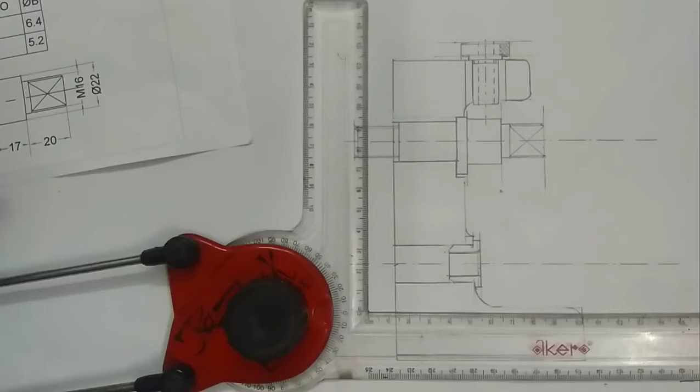In the next step, I'm going to attach this lever. Actually, this one is the jig. I'm going to attach this lever here.

Here it was given the hole diameter was 22. So we know that this diameter is also 22, and the thickness of this lever is 20. Mark 20 mm.

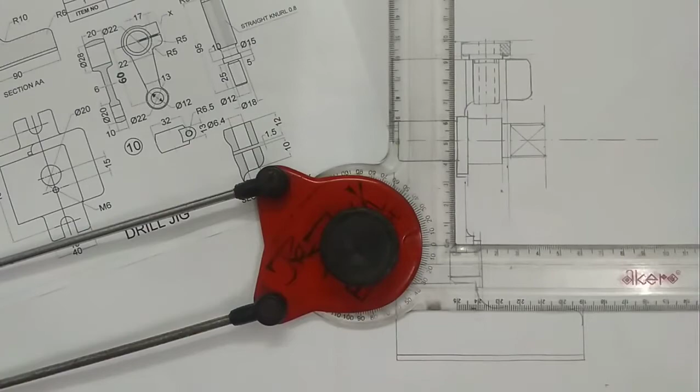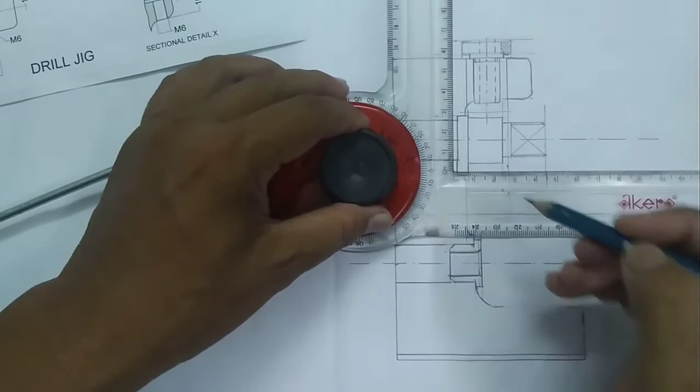This 2-point gap is 28. So from the center line you mark 14. So from here 14, and this distance is also 14.

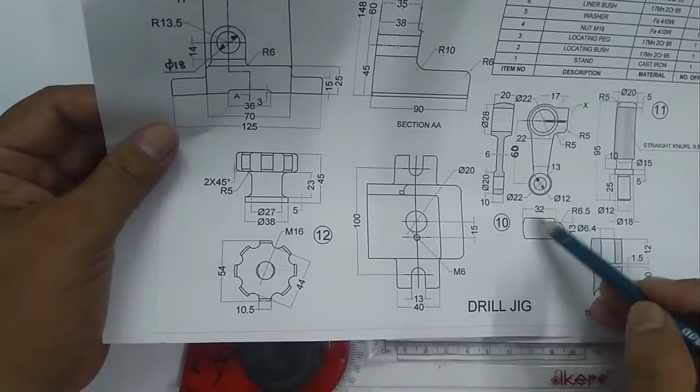And we have to find this point. From the center point to this height we have to mark, which was not given in the front and side view, but in the top view it was given 32. So this diameter is 32, which means from this to this point the distance is 16.

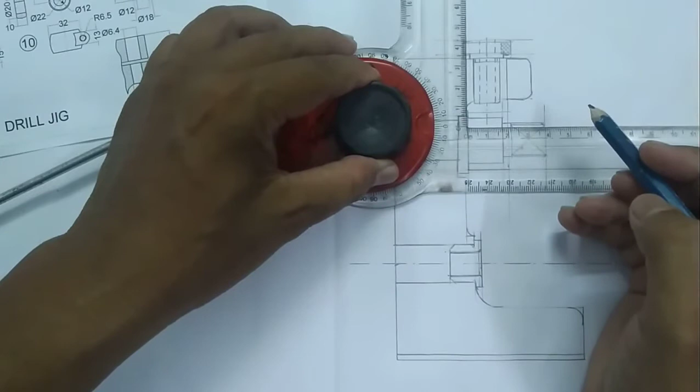So if we first mark the midpoint, here is 10 mm. So this is the center line of the lever, and then mark 16.

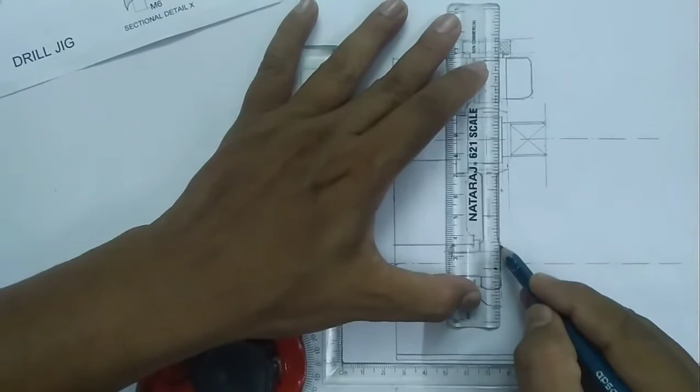In the next one I am going to attach this knob, part number 12 and nut.

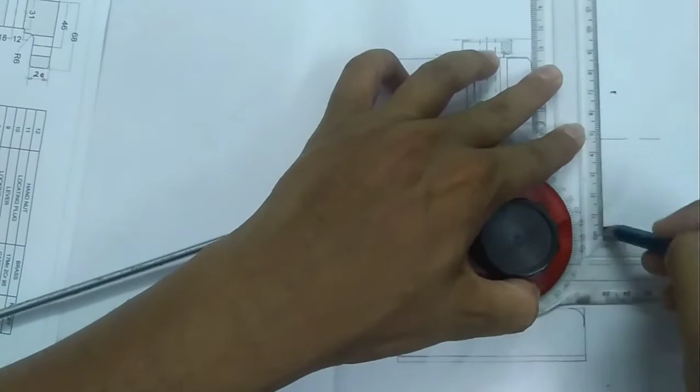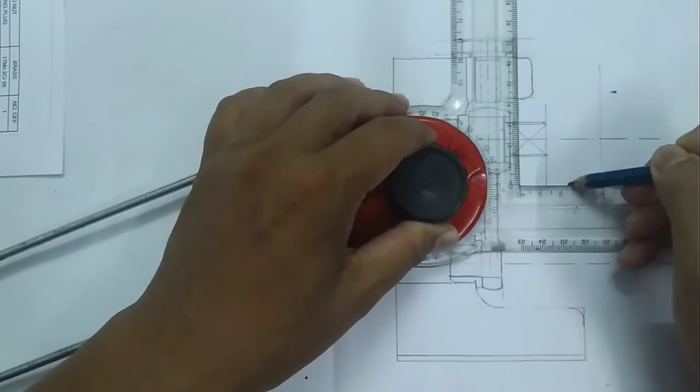So this distance, total distance, was given 45. So from this point measure 45. Also this gap is 5 mm. This distance is 23. This diameter was given 38. So from the center line you will get 19. From here you mark 19 mm.

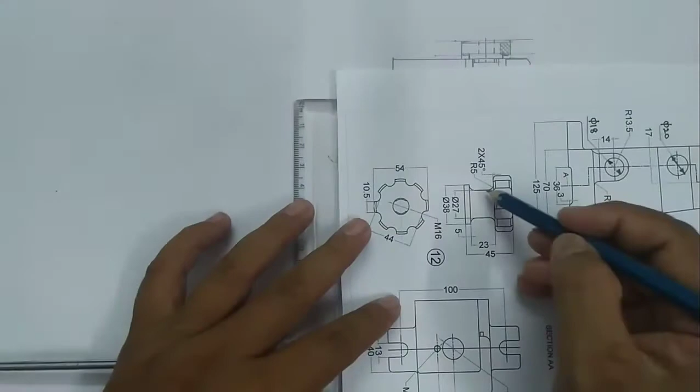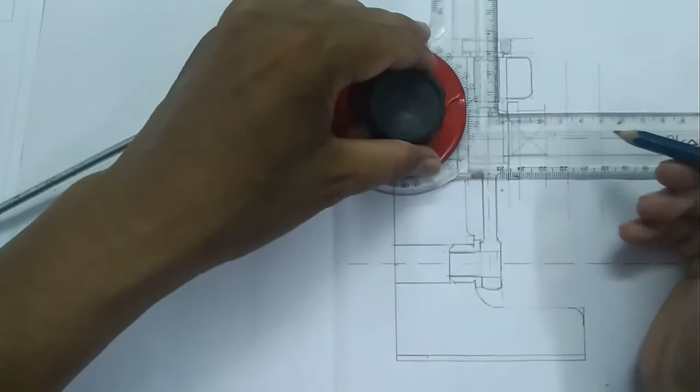This distance was 27, so half of it is 13.5. Mark a point between 13 and 14. And this diameter was given here 54, which means 27.

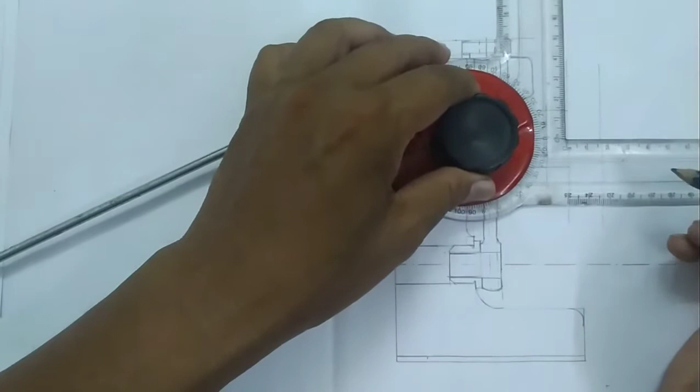Here you can see the chamfer angle was given 45 degree, distance is 2 mm. Rotate your drafter to 45 degree.

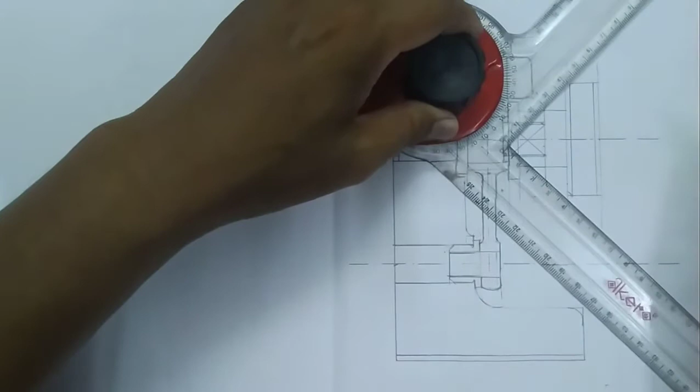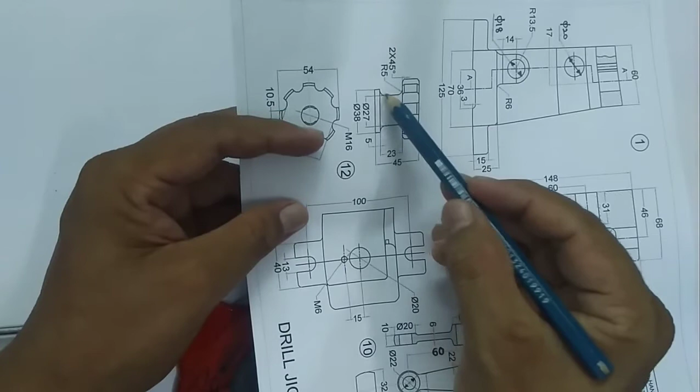Then you can see the fillet. Here the radius was given 5, but here the radius was not given, so we can choose any radius. Choose 10 mm diameter circle to fillet this point.

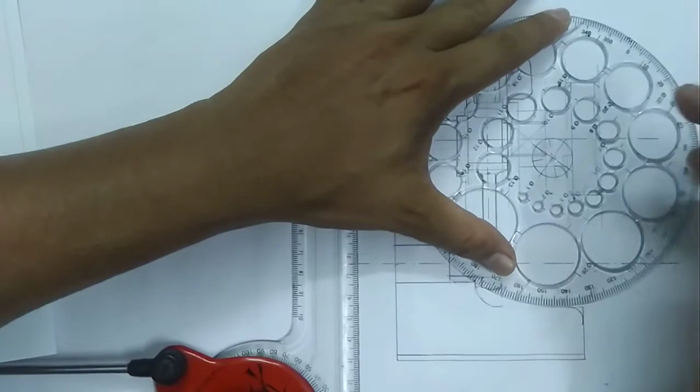Also choose a smaller circle. I am choosing 8 mm diameter.

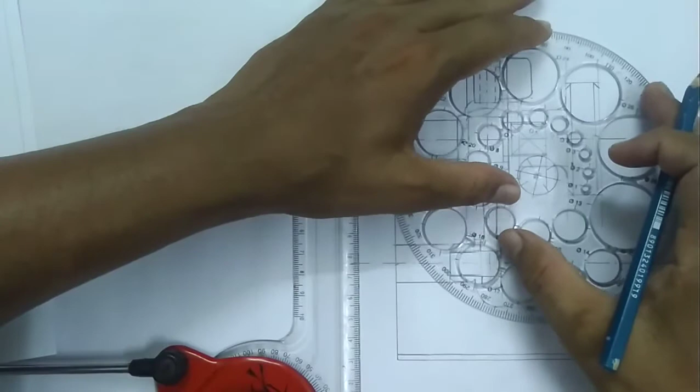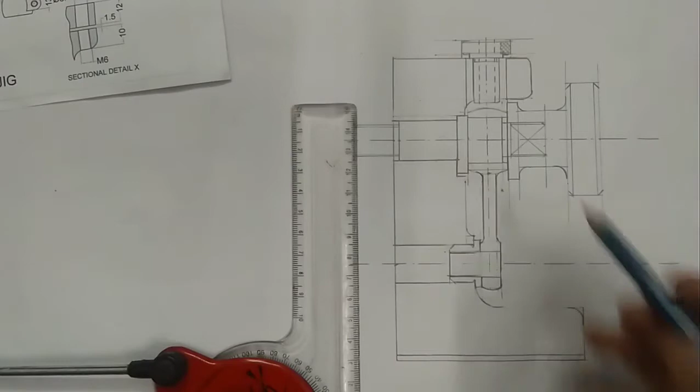Also you can see a threaded hole of major diameter 16 mm. 16 means 8. So we know that this portion, this diameter is also 16. So we can directly draw lines from here.

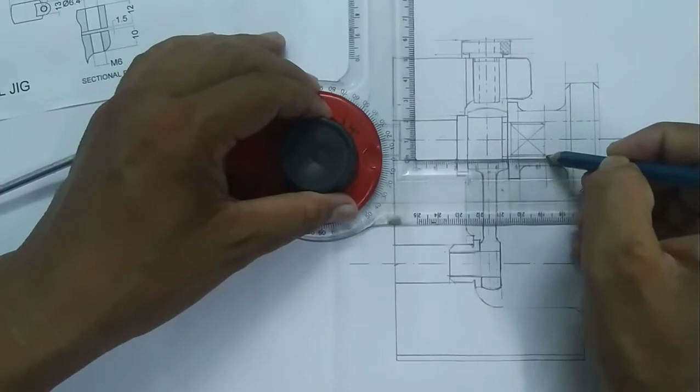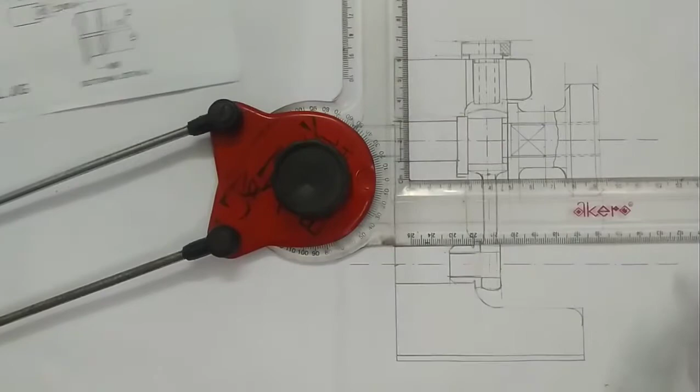Here I am going to do some local section. And these lines, in order to draw them, we have to project from the side view. As I am not yet drawing the side view, after drawing it, I can project the lines here. So at present I am leaving it as it is.

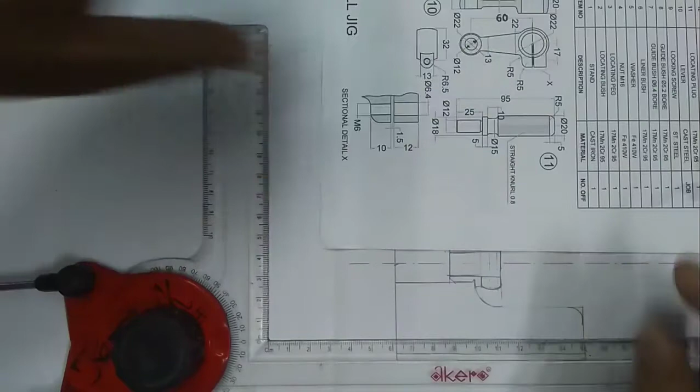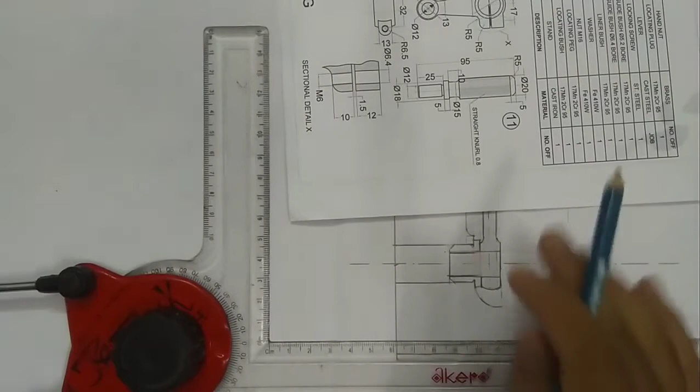Then I am going to draw part number 11, the locating plug, this diagram. So we can see the diameter here, it was given 12 mm. We know that the hole diameter is also 12 mm, so we can insert the plug up to this distance. So this distance was given 25.

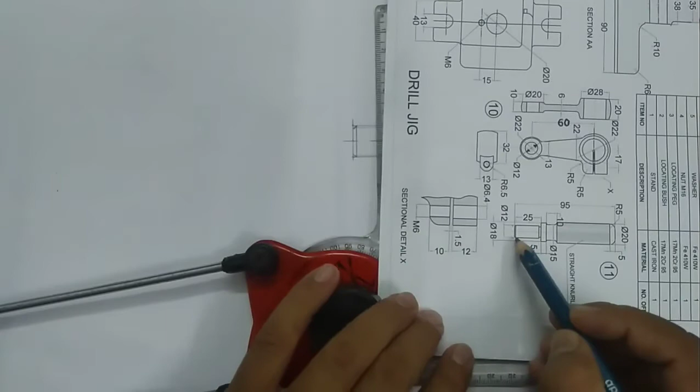So it was matching correctly, this distance is 25 exactly. You can see a small chamfer at the end corner, so we can chamfer here.

Then here you can see a small undercut. The distance was not given, so I am choosing the distance myself, a small undercut. Then this thickness was given 5 mm.

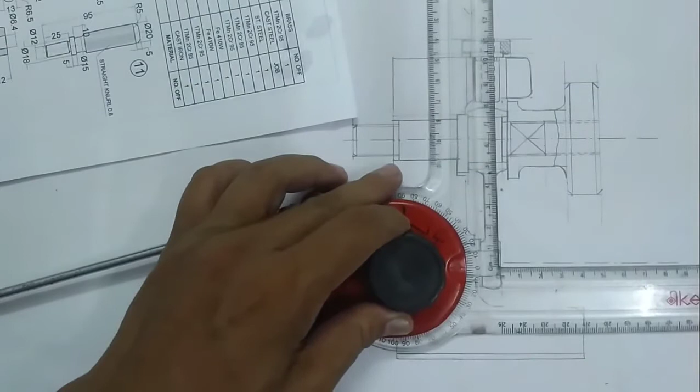And from this to this distance is 10 mm, and the overall distance is 95 mm. Here the fillet radius was 5 mm, so this distance will be 5 mm approximately, which was not important. So this distance is 5 mm, and the diameter given was 20.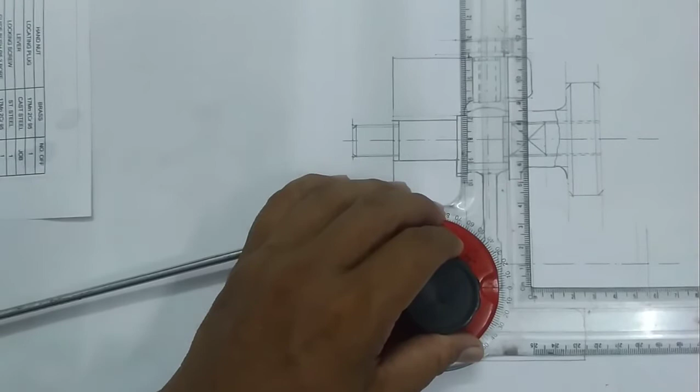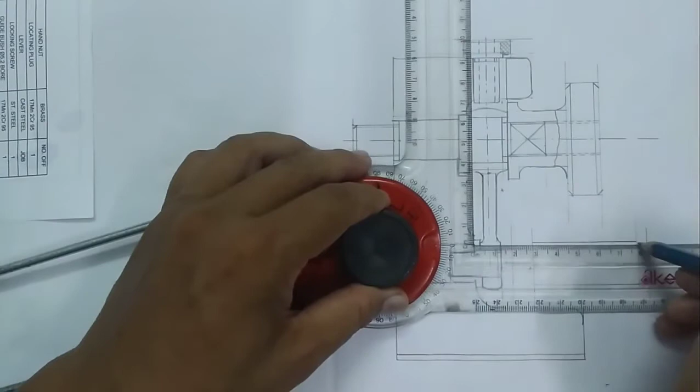So from here I am drawing a line 10 mm below the center line. Choose pro circle to draw the fillet radius of 5 mm. I am choosing 10 mm diameter circle.

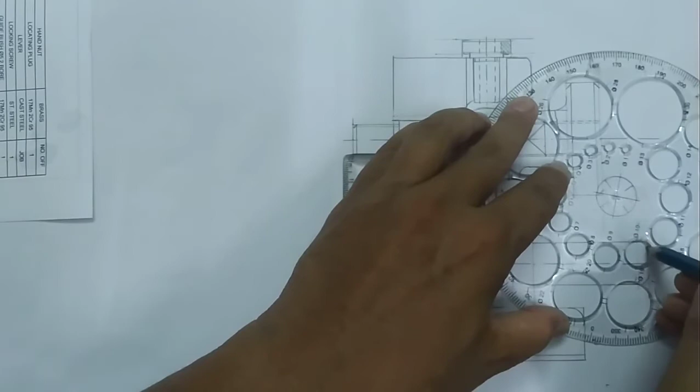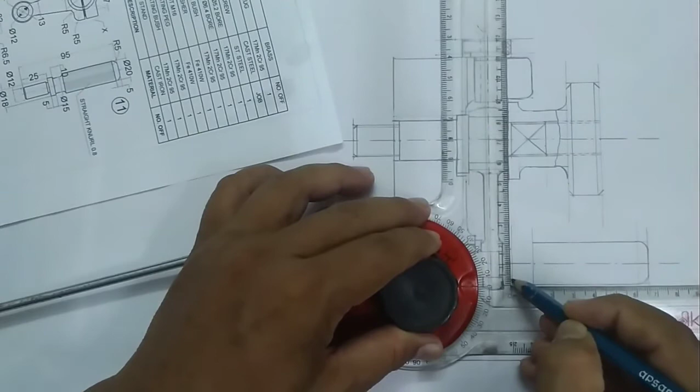And this diameter is 15 mm, so you mark 7.5 and 7.5. Small fillet here.

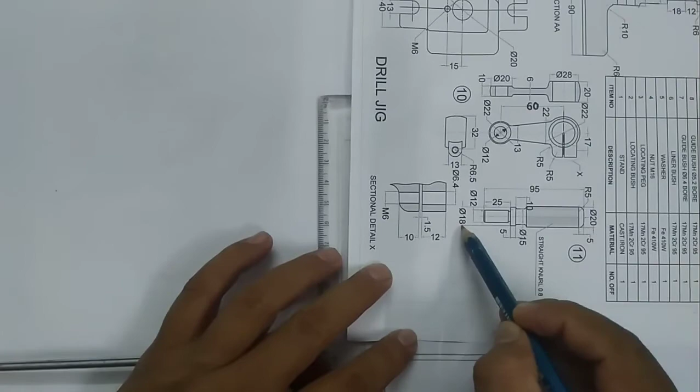Then this diameter was given 18 mm.

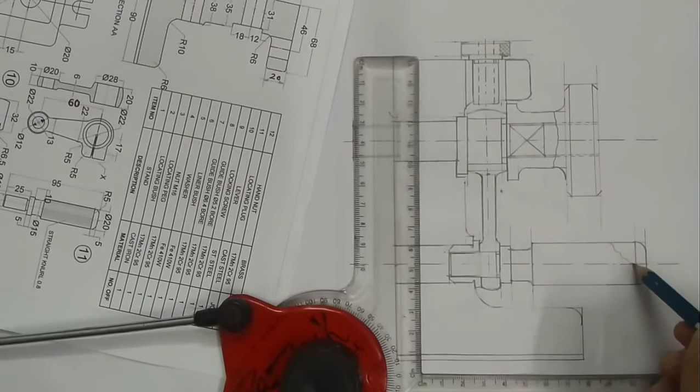Here you can see a parallel knurling. No need to draw it fully. You can indicate the knurling in a small location, that's enough. Draw very light lines.

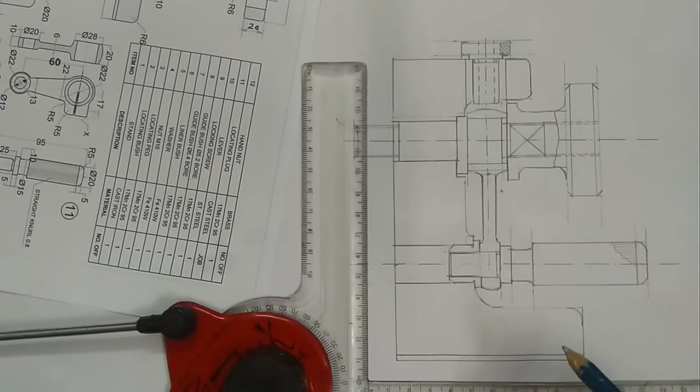So that's all. After that, I have to attach a washer and a nut here. Here is the washer, the overall diameter is 36 and the thickness is 3 mm.

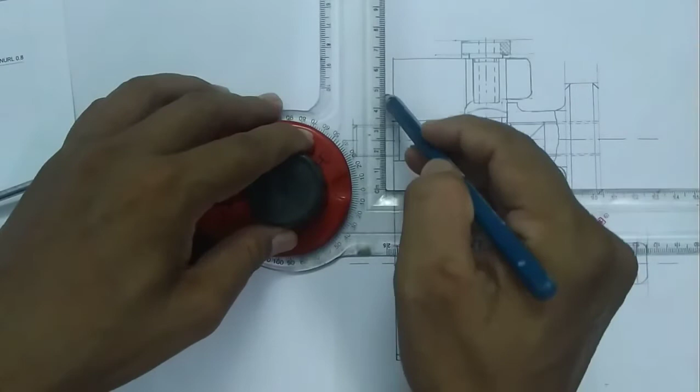So this distance is 3 mm. Diameter was 36, so half of it is 18 mm.

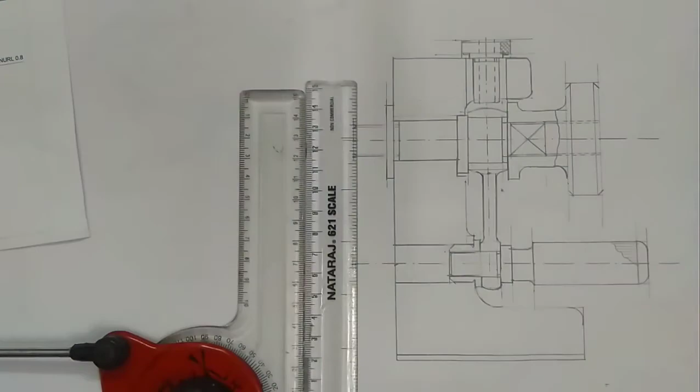Here the hole diameter of the washer is 16.5. Half of it is 8.25, which means more than 8. You mark a line.

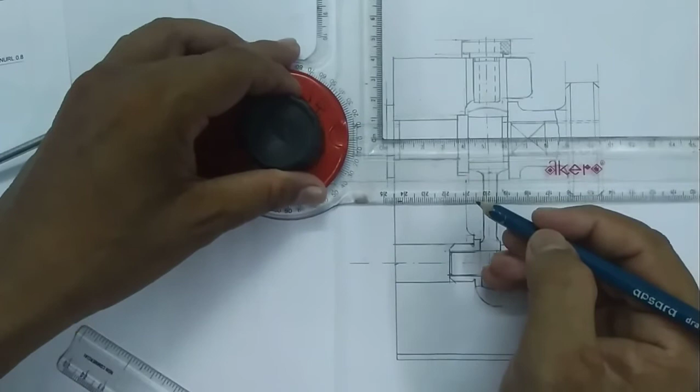Then we have to draw this nut. This is of thickness 13 mm and M16 nut. So 13 mm, from here you mark 13 mm.

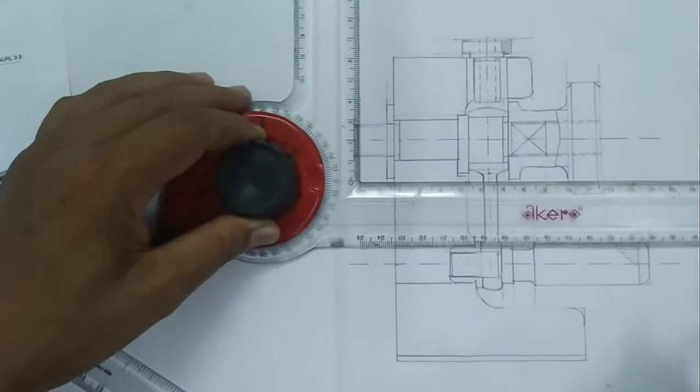M16 means from the center line the distance will be 16 here. From this to this distance 16, so total distance will be 32.

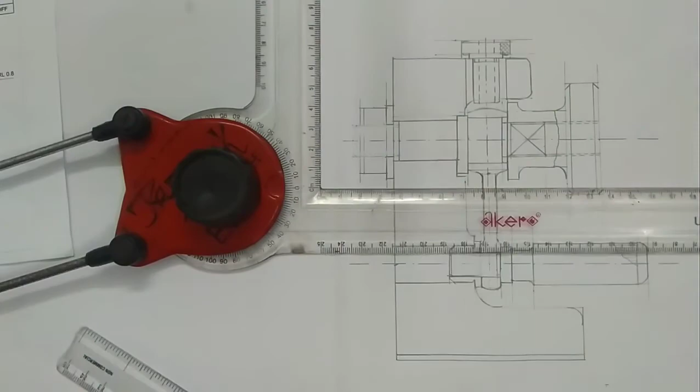For the nut you draw another parallel line, leaving a gap of 2 mm or approximately 1 to 2 mm. So give approximately this gap, and choose circles to connect these 3 points 1, 2 and 3.

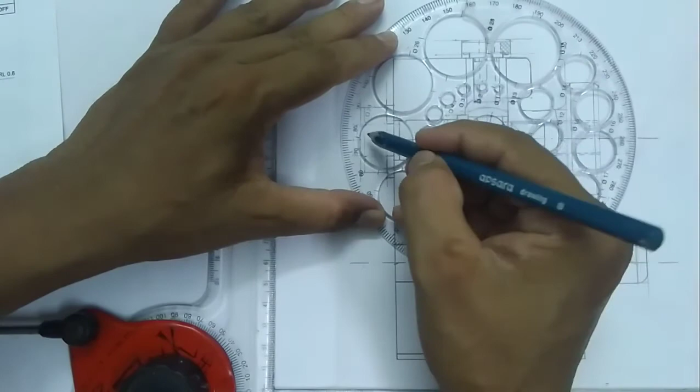I think this circle will be suitable for the arc.

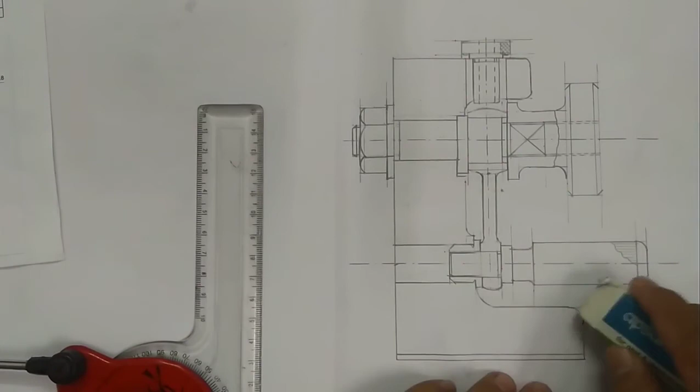So that's all, we have assembled all the parts. The next thing is we have to draw the side view.